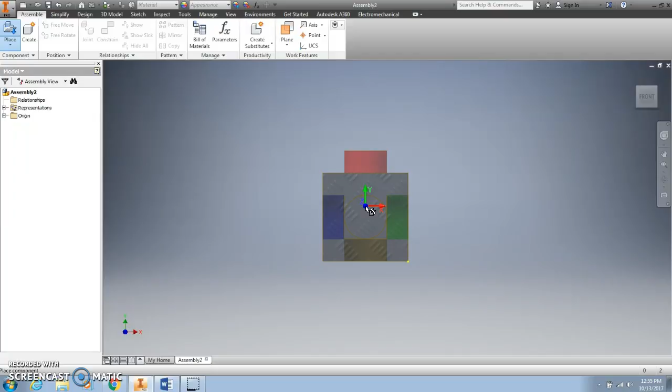Now to place my part, I simply click on the screen, and the part is there. I'm going to zoom out a little bit so I have more work room. Now if I just simply move my mouse to the side, I can put more parts down by just clicking on the screen.

For our first project, you have to put 5 cubes together into one solid piece, so I'm going to place 5 total cubes on my screen. To stop placing cubes, move your mouse over to the side, right-click, and go to Cancel.

Now I need to assemble my 5 cubes into any piece, as long as there are no areas where 2 of the same color are directly side by side. And I also cannot just put them in one straight line.

I'm going to first need to ground one of my pieces so that it cannot be moved around the screen. So select any piece you want and right-click it, then go down to Grounded and click Grounded.

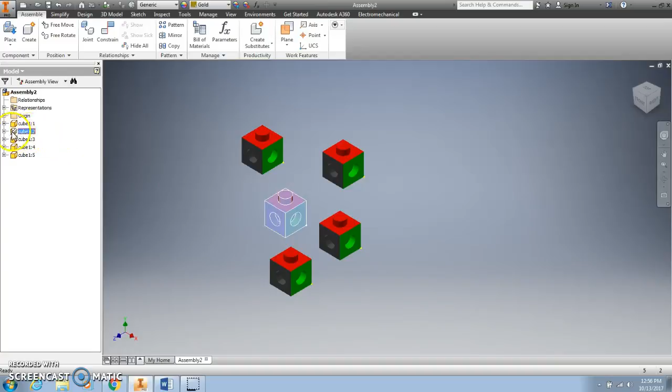Now you'll see over here on the left side there's a pin through that object, and if I click it, I can't move it anywhere. I can move any of the other objects anywhere I want on the screen, but I can't move my grounded one.

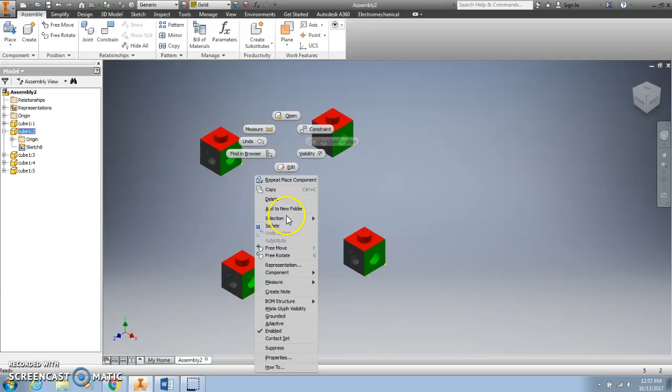Let's say for some reason you change your mind and don't want that to be grounded anymore. Simply click the plus sign, right-click on the name of it, and then click grounded again, and it will not be grounded anymore. You can also right-click directly on the object, so I'm going to reground it here.

Next, I need to mate some cubes together to make a piece. So the first thing I'm going to do is click one of my cubes, and then I'm going to click the Constrain tab. This is how you put your cubes together. Now, for this cube, it's behind the window, so I'm going to have to move it real quick.

Now, to constrain them together, you have several options. You can use the center line right there, you can constrain an edge to an edge, and you can constrain a face to a face. So I'm going to first show you how to constrain using center lines.

Sometimes to find the center line, you may have to zoom in on the object a little bit in order to get the center line to appear, but you simply move your mouse around until that dotted line down the middle appears, and then click on that line.

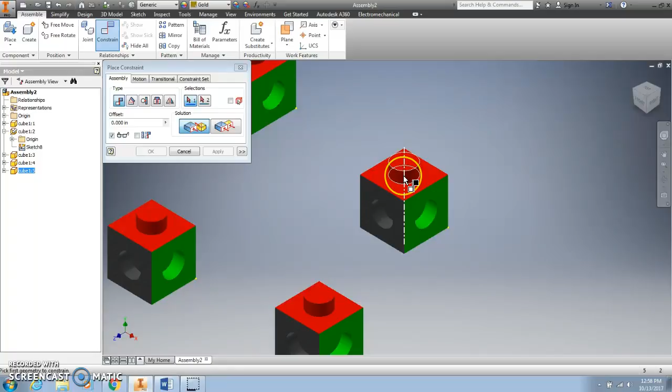Now I'm going to find my grounded piece, which was this one, and since I clicked on the line where the peg was and I want to put the peg in a hole, I'm going to choose a hole and zoom in until I find the dotted line and click that again.

Okay, this has mated the center lines of the blocks together, but as you can see, I can still move this block in several different directions. So that's not a solid puzzle piece that I've made, and I can also rotate it.

So what I need to do is make it so that I can't move this block. The first thing I'm going to do is rotate it because I noticed that my diamond plate face was touching the other diamond plate face, and remember that no 2 of the same faces can be touching each other.

So now what I'm going to do is mate the faces of the blocks so that I cannot move this other block. So I'm going to click Constrain. This is the mating part of Constrain, and it's already highlighted. So I'm going to click the face here.

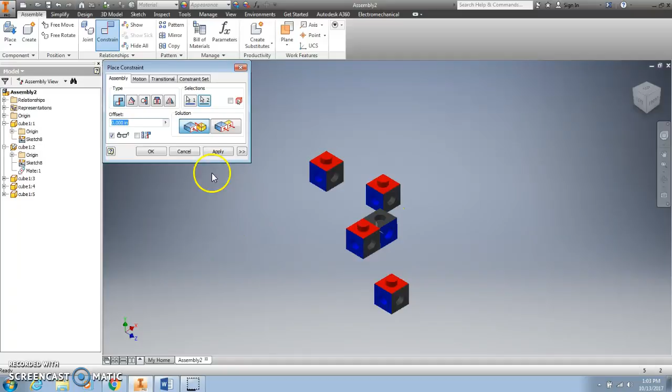Then I'm going to need to use my ViewCube and rotate this around so I can select the face that I want to mate it to right there. Click apply because they went together correctly.

Now, you'll notice that I can still rotate this block, so that's still not one solid piece. I have one final step. There's actually two ways you can do this: you can either mate the edges together or you can use the flush tool.

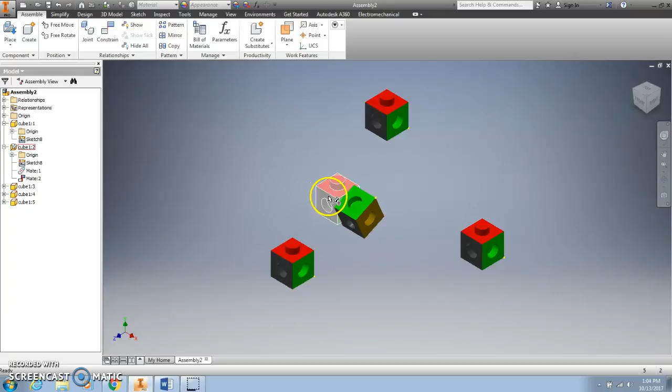I'm going to show you how to use the flush tool because I haven't shown you how to do that one yet. So the way I'm going to do this is I'm going to click the Constrain menu, and this time I'm going to come over here to the right side and click Flush. Flush, if you look at the icon, will make two faces perfectly in a straight line with each other.

So I'm simply going to click this face, and now they are in a perfect straight line with each other. Click apply. When I cancel my constraint menu, you can now see that I cannot move either block, so now I have a solid block consisting of two cubes.

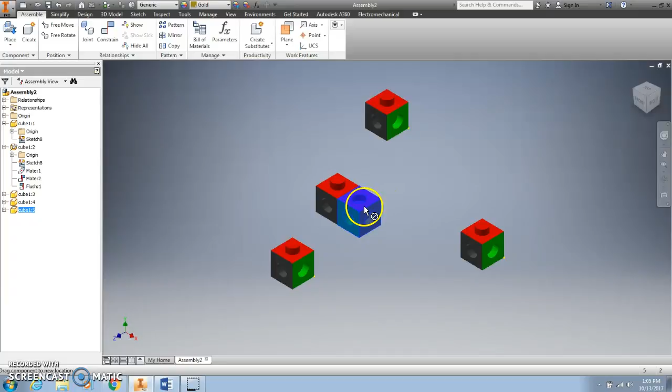I'm going to continue placing cubes in the same method until I have a solid block of 5 cubes. So first I'm going to click my constraint menu. I'm going to put this cube, zoom in so I can find the center line, into this top hole here. Click that center line. That looks like a complete mess, but it's actually very easy to fix. So I'm going to click apply.

Now I'm going to cancel this, and I'm going to move my mouse until the bottom cube that I just moved is highlighted. Click it, and I can drag it up and down. So I'm going to put it up above because I wanted to put it in that hole right there. Next, I'm going to click Constrain, and I'm going to constrain these by edge. So I'm going to click this edge and this edge.

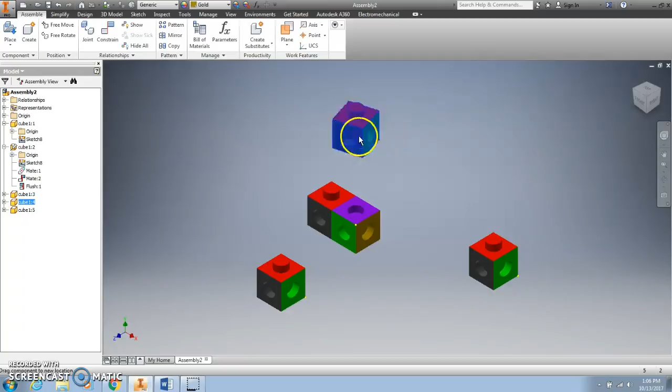So I didn't like the way that they went together because this block went inside the other block. So here's another option you have. Since I can only rotate this cube sideways, but I want it to move the other way so that the peg is on the bottom, what you can do then is click free rotate, and then you have to click the cube that you want to rotate and hold the left mouse button down until I get it rotated so that the peg is down.

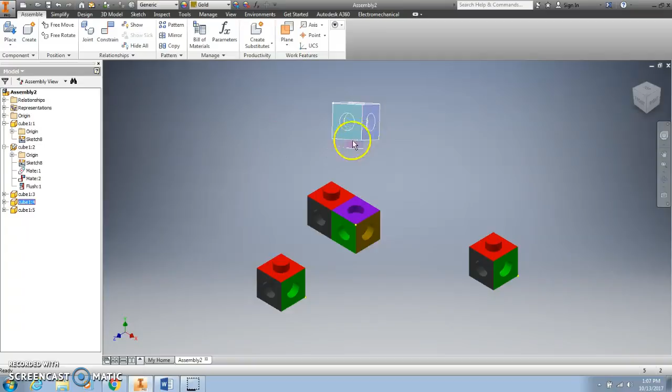Then I simply click somewhere else on my screen, and I can go back here to the Constrain menu, click this edge, click this edge, and now you see that they have gone together. However, the two green sides are now touching, so this won't count. So I'm going to click cancel, and I'm going to try again.

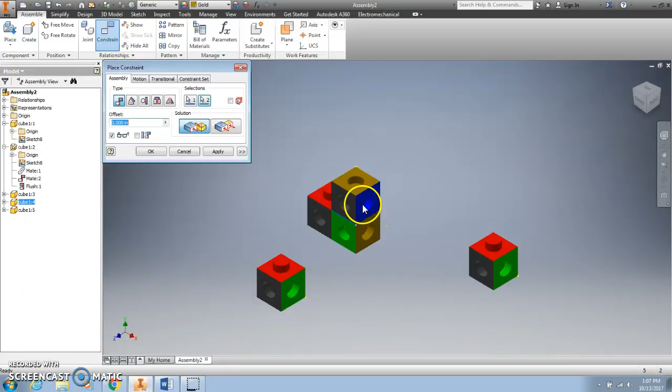Open up my Constrain menu. I'm going to try this edge and this edge. Now I don't have any of the same colors touching, so I'm going to click apply. I'm going to check on my other faces of my cube and make sure I can see there are no same colors directly next to each other. Okay, so now I only have 2 cubes left to place.

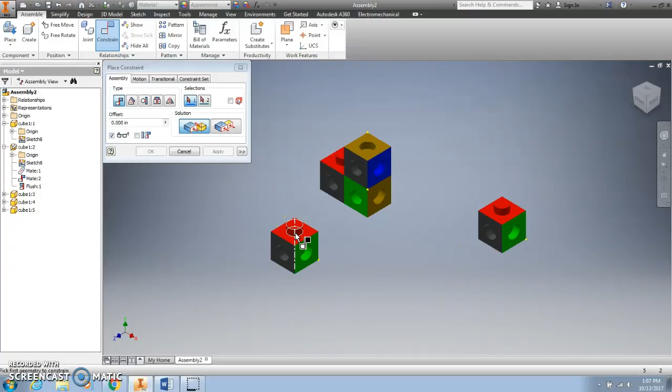I'm going to place this cube, zoom in until I can find the center line here. There it is. And I'm going to put that in this hole here. They went together quite nicely, so I'm going to click apply. But notice if I cancel my constraint menu, I can still move this cube. I can't move any of the other cubes that are joined, so it's not really a solid block. So I need to constrain them again.

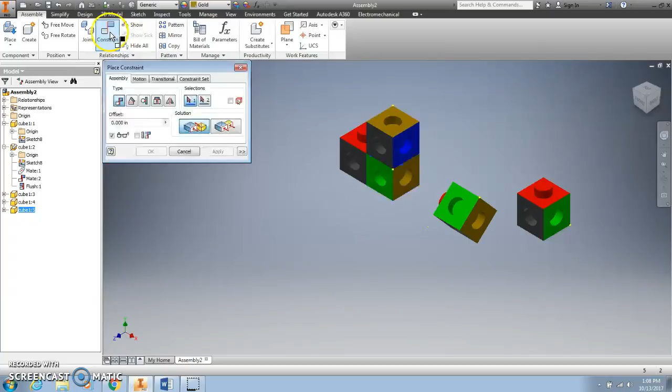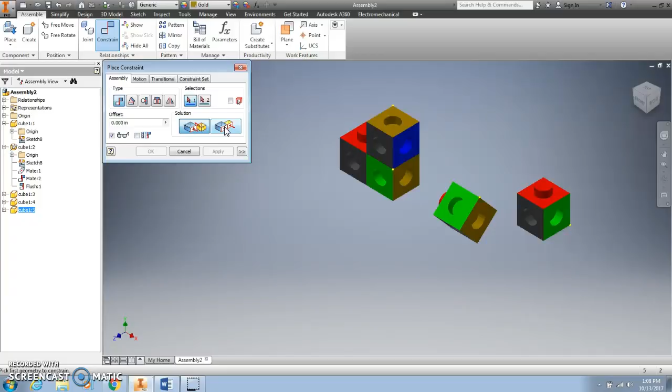I'll have to either mate edges together or mate faces together, or I can mate the faces and then use the flush. So I'm going to show you again how to do the mating faces and use the flush method. So I'm going to click this face, then I'm going to have to change my view cube around until I can see this face and stick those together and click apply.

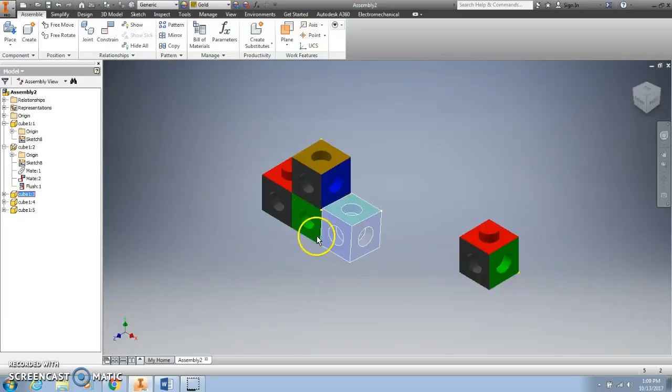And then I'm going to flush them. First, I need to rotate this a little bit. There we go. Now I'm going to flush these, so I'm going to click the flush icon, click this face, click that face. Now they are completely in a straight line with each other. All right, so I have one cube left to mate to the rest of my block.

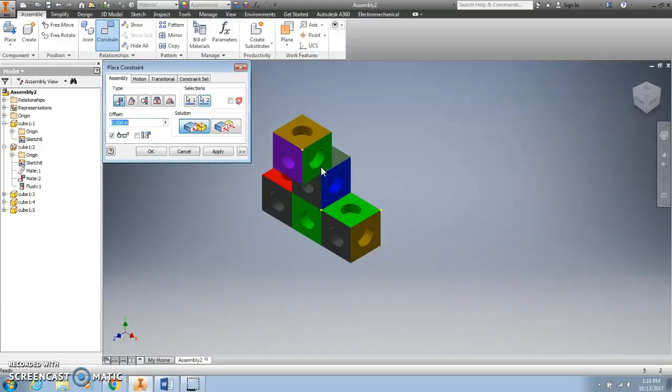So this time I'm going to do something a little bit different. I'm going to click the constraint icon, and I'm going to mate these by using faces instead of the center line. So I click this face here, and click the face up here that I want to stick it to, and then click apply. Now notice that these are definitely not in a straight line. This purple face is sticking way out from the gray face, so that peg wouldn't really be in that hole.

This is a simple problem to fix. I simply click on the flush icon, click the purple face. I want to make it flush with this gray face right here, and click apply. And now I'm going to click the green face over here, the blue face here, and click apply. And now they are in a complete, perfect straight line.

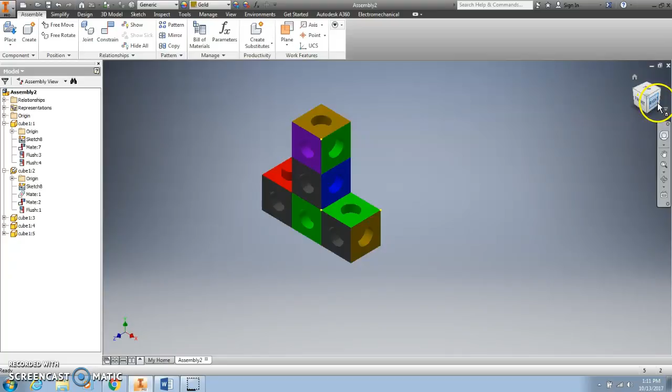If I cancel my constraint menu, you can see I cannot move any of my blocks. So I have built a solid 5 cube block. If I look over here on my view cube and check my other views, I can see that there are no places where the exact same color is touching a face of the exact same color. So my 5 cube assembly is now completed. Save this file to your H drive and show your teacher.